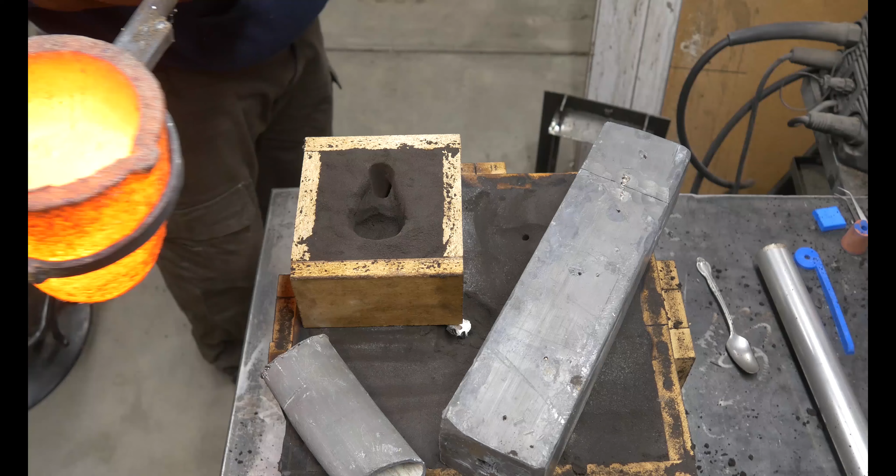If I ever thought there was a chance I would get a deal with Devil Forge where I could promote their furnaces, that is done with this video. Not a single chance. I give grief to those guys, call them the Lithuanians from Lithuania, but in fairness to them, it's easy to pick on the big guy. They own the market, no question about it, and they've done more probably to enable people to get into metal casting and foundry work than anybody else I can think of. So hats off to you guys for doing that, but I'm still going to pick on you because I'm the little guy.

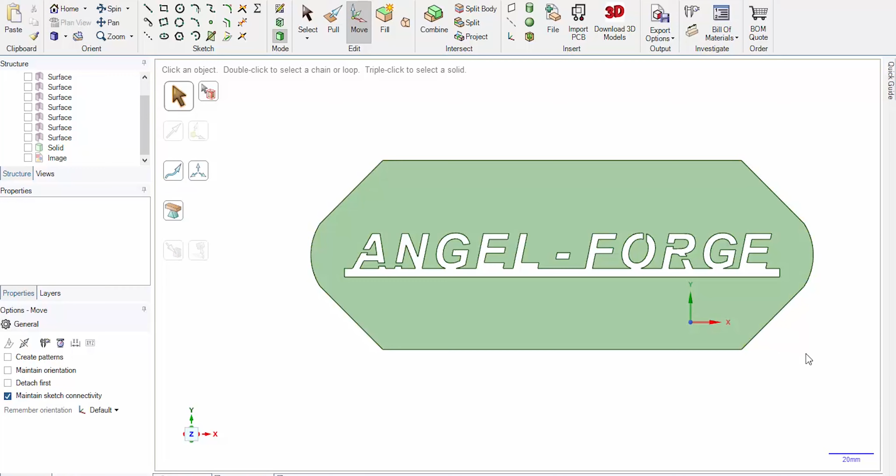First of all, this is why it prompted me to talk to Julian. But second of all, I actually do have 3D modeling skills, I'm not a complete loser. But that was the plaque I originally designed. It very much mimics the Devil Forge plaque.

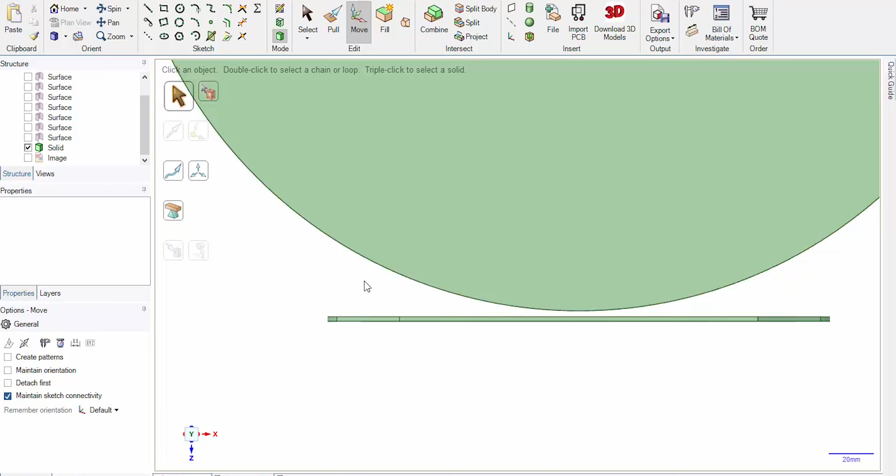Problem is it's flat, and if you put this furnace in there with it, you see there's a big gap here on the edges. And I don't think you can roll or curve aluminum. So I thought, well, maybe I'll just cast a curved one like this, and I modeled up a curved one.

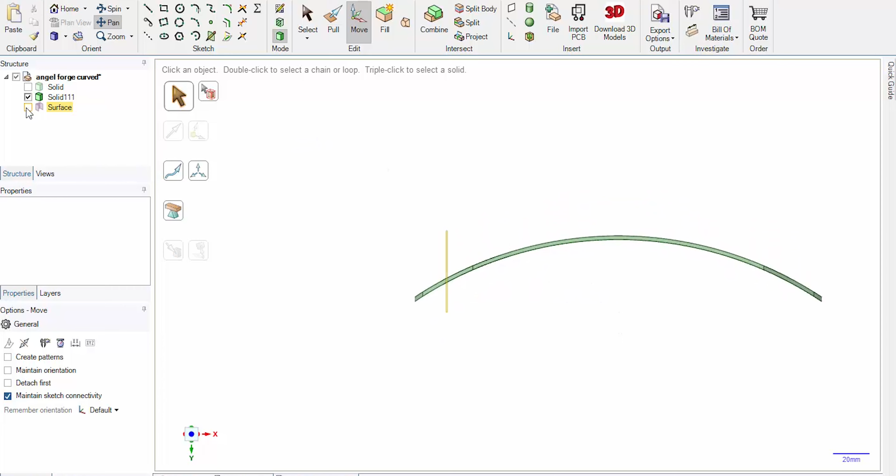Well, the problem comes in the drafting of the letters behind, and Julian kind of alluded to this as well. This is the direction this wants to move, right? It wants to move straight out of the sand if I were to cast it. And if I put a line in there that indicates that direction, and look inside the letters, you can see the problem right there. The letters would be straight up and down, so I'd still have to draft it even further, and every character is different. This would have been a really tough manual process to draft each one individually.

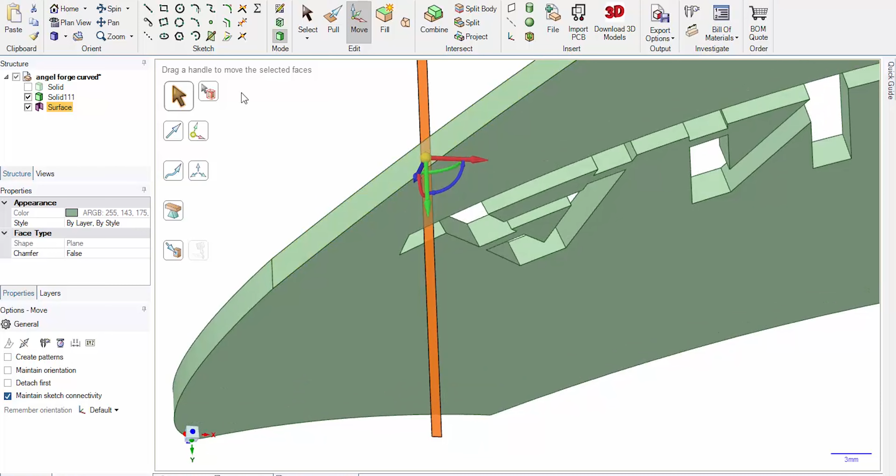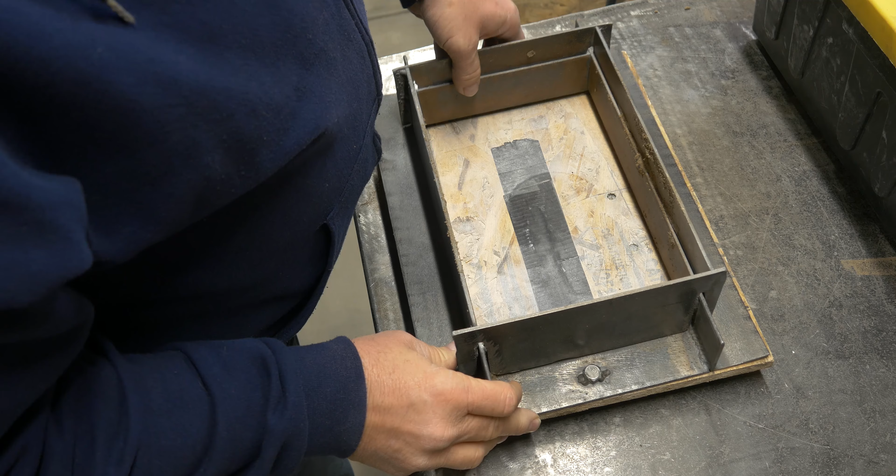So okay, let's go ahead and get into the actual casting. As I sit here doing this voiceover, I'm not exactly sure how I'm going to do this edit. I was thinking about showing everything, but maybe I'll just skip stuff you've seen a million times.

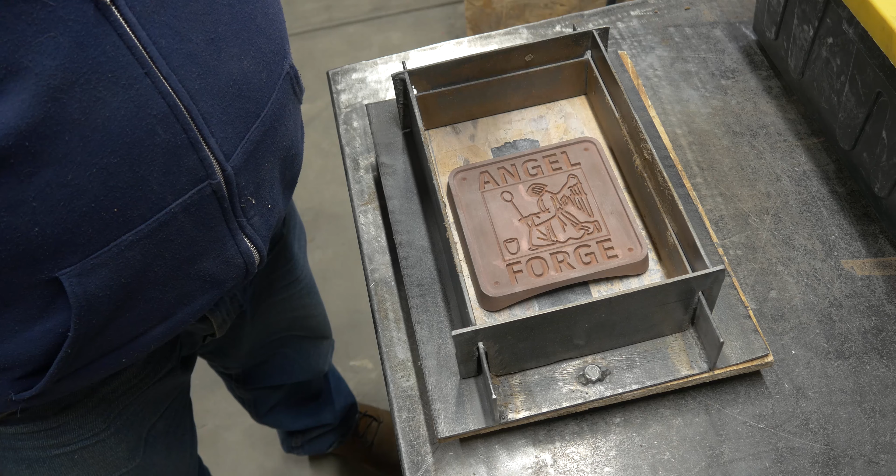Here's what's interesting about this pour: we're going to pour it face up in the cope. Normally people would pour this thing face down in the drag, it's probably the easiest way to ram it and probably the easiest way to pour it. But the nice thing about pouring face up in the cope is I don't have to worry about loose sand affecting the face of my image, which is kind of a nice deal. So we're just going to ram this thing up. This is actually in the cope right now.

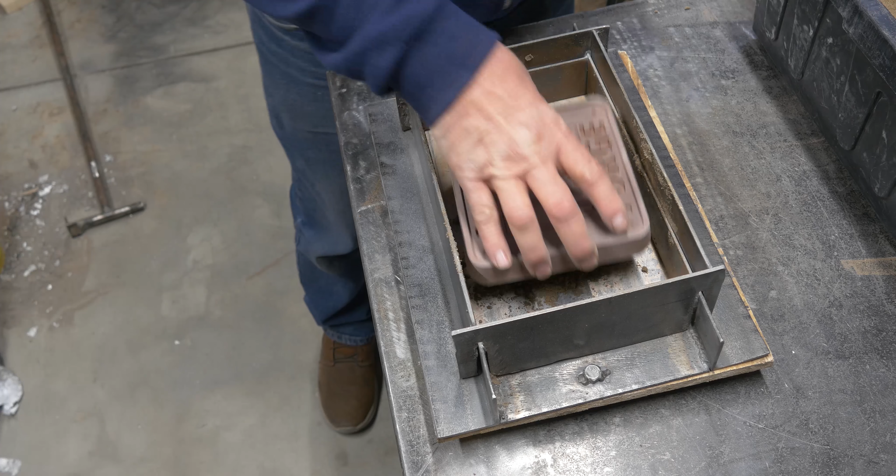I'm going to put some sand underneath the mold to support it because it flexes when I ram this thing up, and I wanted to try to keep it as flat as I can. I probably should have put some more sand underneath there because it still flexed a little bit.

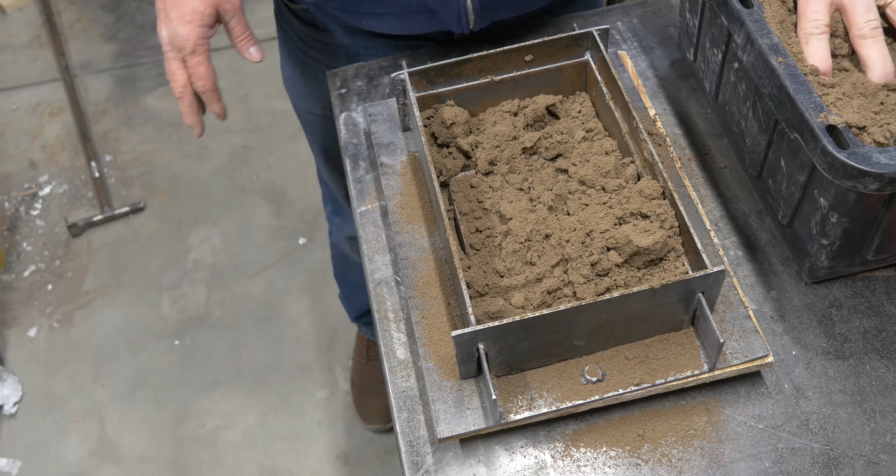We're ramming what's called a false cope. A false cope basically is we're going to ram this thing up, and we're just using it to get the drag rammed up. We're going to tear this thing apart and re-ram it once I have the drag done.

All right, I've got my false cope rammed up now. Got the table all cleaned up so I can flip it over. And there's the support I had underneath the thing.

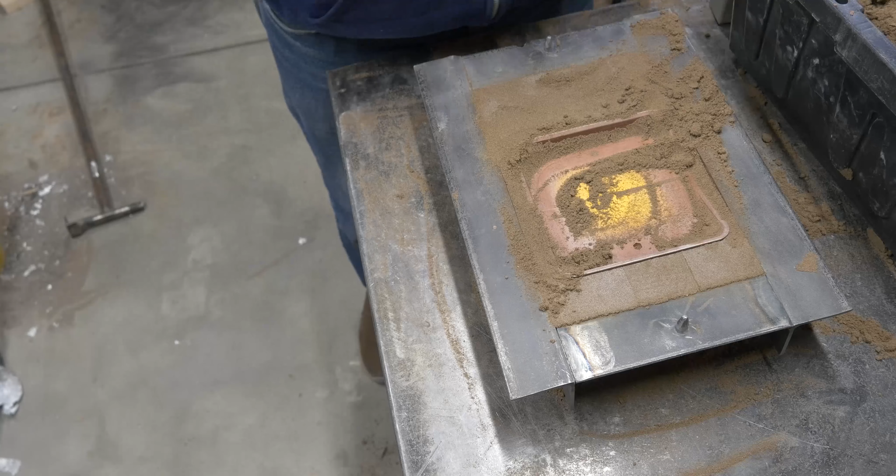Now comes the process of getting the mold ready for the drag. What we're going to end up doing here is a process called coping down. We're going to cut down to the cope line, the parting line. Maybe it's parting down, I don't know.

But basically what you see me doing with the spoon there is cutting an edge so that when I ram the drag, it will actually build in the support mechanism underneath that part of the pattern. This would have been really nice had I had a wider flask, a wider box to cast this in, because I've only got about half an inch, 12 millimeters or so of space here between the part and the box.

And it's really just not enough to get enough sand support in there. I wanted a nice diagonal line, I call it - I don't know what you call it. I wanted an angle so that I could get down to the part, and I'd also have a nice release mechanism for the drag when I ram it up here.

So I'm kind of cutting it down at an angle. I don't know if you can really tell that, but that's kind of what I'm doing there. And I'm pressing it down in there, trying to get it tight and hard. That was the other problem with having such a small space - it was hard to get it rammed in there and get a nice firm surface to ram against. And that's one of the things with these false copes: they need to be hard enough that they're not going to deform when you do the drag.

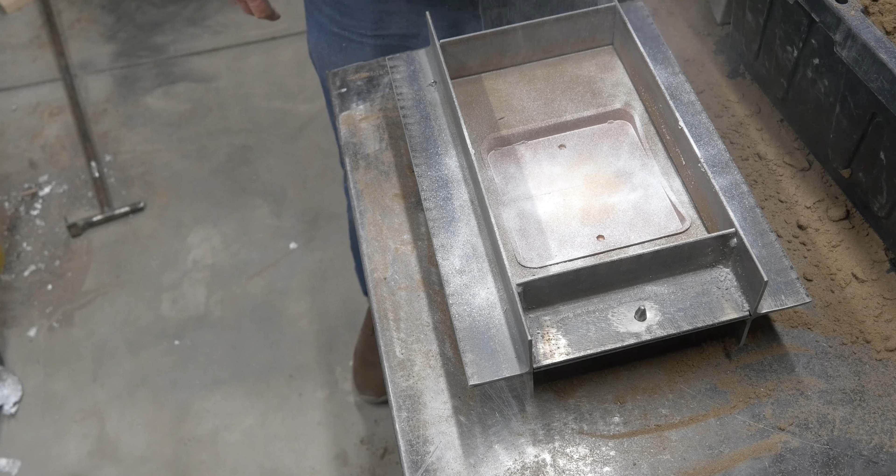Put a lot of parting compound in here because I want this thing to come out of the mold cleanly. And then go ahead and lay in our runner and spin trap as well. I want to try to position it in the right place for the gate that I'm going to put on there. You'll also see in the end, it didn't work out that way.

That's all right, it worked out. Everything worked out in the end. And we'll just riddle in some more sand and fill in the drag as if we were doing a normal pattern here.

Okay, we've got everything rammed up, cleaned up - not really cleaned up, but we're going to go ahead and pull this false cope off and ram it up. And you might be wondering, why in the world would you do a false cope? There's the support mechanism that's built - that's the big reason we do it. But why not just ram up everything and use it, right?

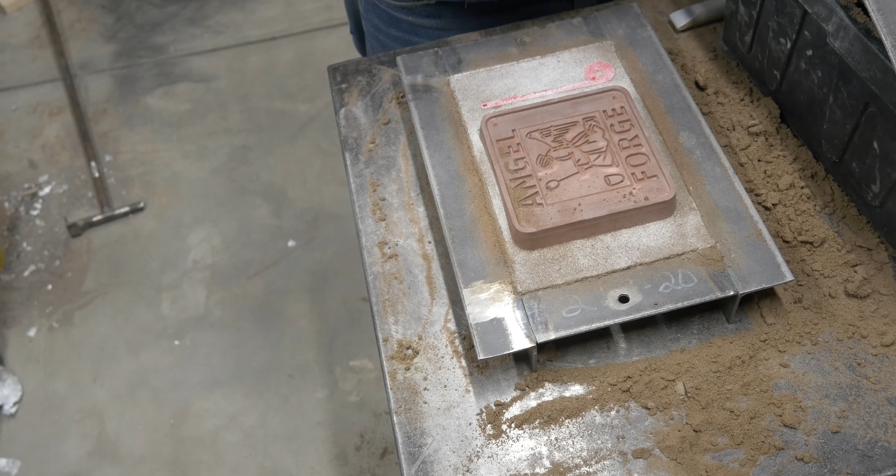Well, you'll see here in a second that the reason we don't do that is I don't have a sprue rammed in there yet. I don't have the vent in for my surge trap or spin trap. I don't have the extra upper half of the spin trap in. And that stuff would be really hard to do in a false cope because you've got it upside down and I've got things coming out of the top of the surface.

So it's a big reason why you don't do it. And it only takes actually a couple of minutes to do a false cope. When I looked at the video here, I'm at about 2.5 minutes to do the false cope.

And that was from start to finish. So it's really not that big a deal to go ahead and just ram one up and then tear it apart and do it again.

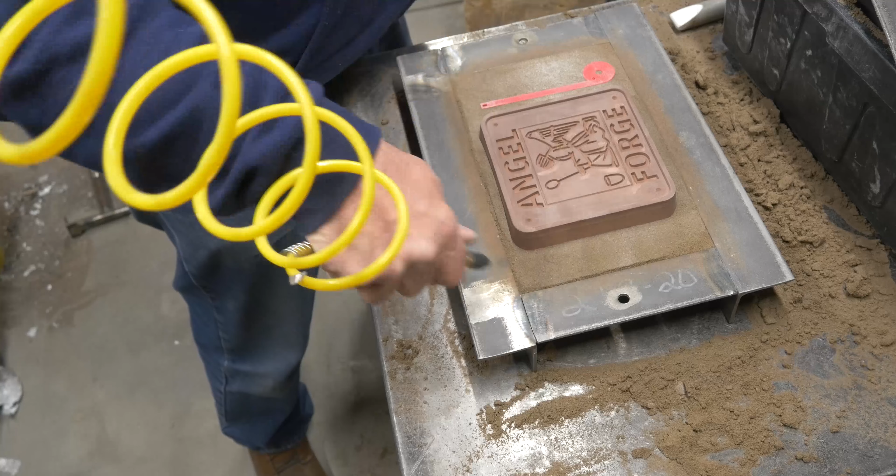Underneath this pattern now, of course, is a nice core that we've rammed up when we rammed up the drag. So now we're going to go ahead and put the cope back on the flask here, and we'll start ramming it up.

Here's my spin trap and a gate that's got to go in there, and lastly the sprue. There, to get it in there.

And a lot of parting compound. This part is hard to cast.

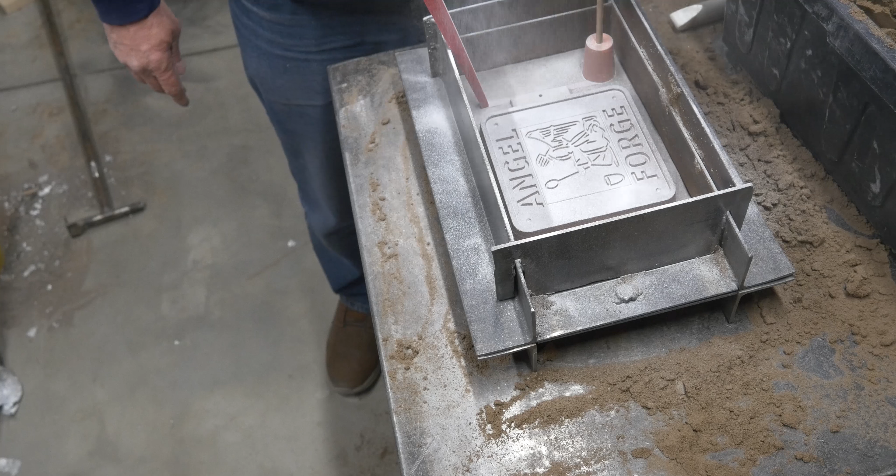When Julian made this thing - Julian, I love you, man - but those letters and all those lines were deep, and it was tough to get that stuff to release. I would have probably...

...made the pattern a little bit shallower, easier to release, but you know what, it turned out okay. You'll see in the end, it actually turned out quite well, but man, it was tough.

Normal stuff here, we're going to riddle sand in and cover everything up with a nice fine layer of sand. No big clumps to have to worry about breaking down while we're ramming.

Then we'll just go ahead and fill the rest of the mold, just like you would normally do.

I probably would have been smart here to press more sand down with my fingers around the edge of that pattern, because I have the same problem now. There's just not a lot of space there, and it's hard to get it to ram in tight because it's such a tight space.

With the box filled in, we can go ahead and start ramming it up. Like I said, I should have probably pressed a little bit tighter in this area that I'm in right now, but it turned out okay.

All right, we're all struck off here, and we're going to go ahead and cut the pouring basin in now.

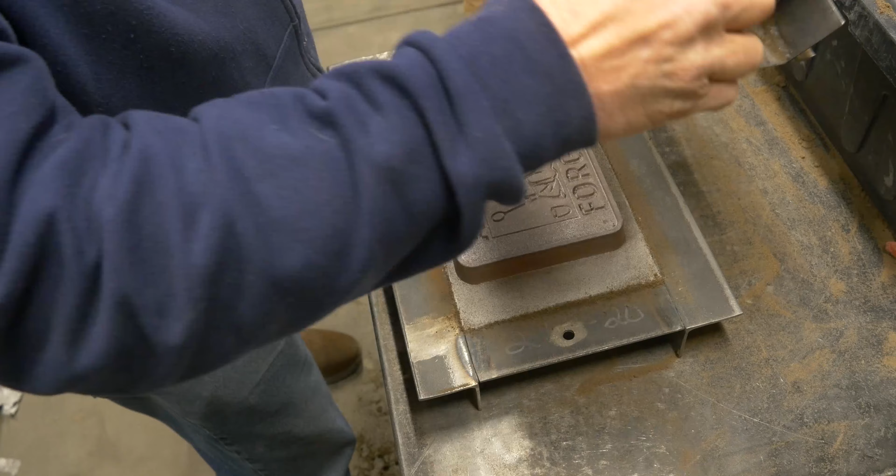All right, basin's all cut. Now let's go ahead and open this thing up and see - there's why I didn't need the pattern pulling holes, whatever.

The things that Julian put in the backside of this thing so I could pull the pattern out - it's stuck in the cope, which made it actually quite nice for getting it off the rest of the mold.

It released pretty clean. A couple of small little issues - some of the definition in the angel got lost, but for the most part, it came out pretty darn clean, so I'm happy with it.

You see me blowing the molds out. I use a lot of air, it's very low pressure. I don't want to tear up the mold, but I want to get rid of any loose sand that's in there.

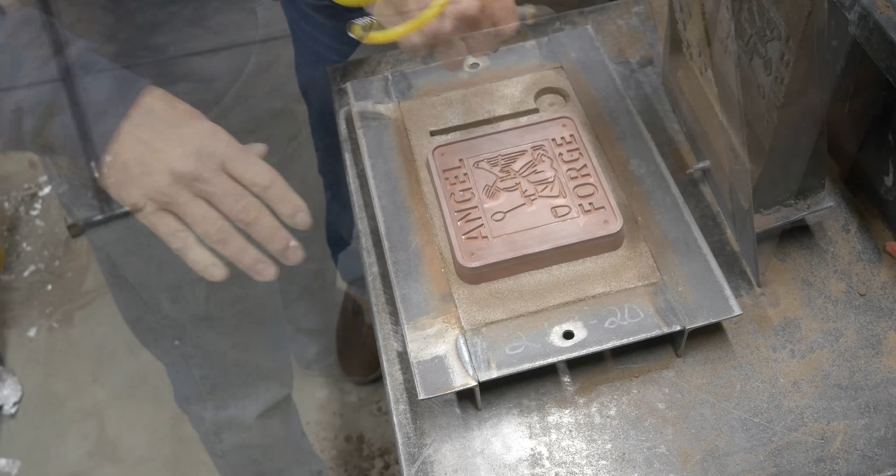All right, so the nice thing about what happened here is I can tap this guy to the side and loosen it up a little bit, and I don't have to worry about breaking any of that fine detail that was up on the face of this pattern.

That's always a concern for me when I go to tap things, and I'm going to just move it sideways and break it off. And it really was stuck down well here - I had to tap it a number of times to get it to loosen up.

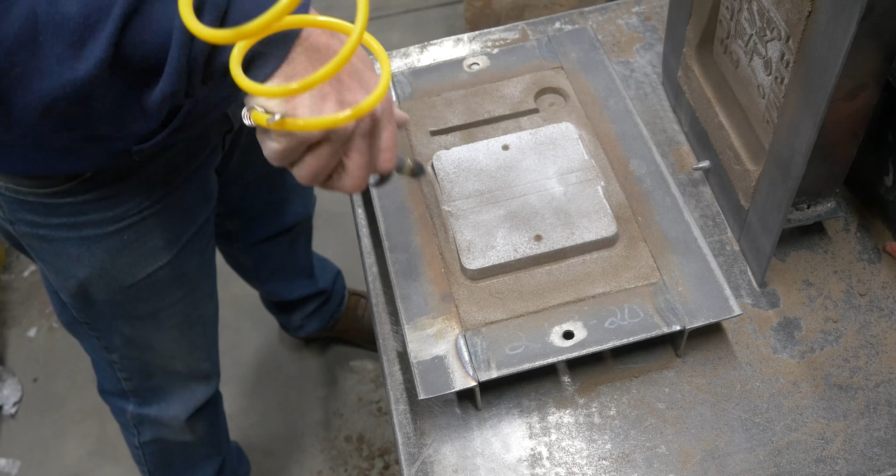There we go, you can see that core rammed up really well. We have the edges, the curved edges that are going to go against the curve of the furnace are there. Really nice core came out.

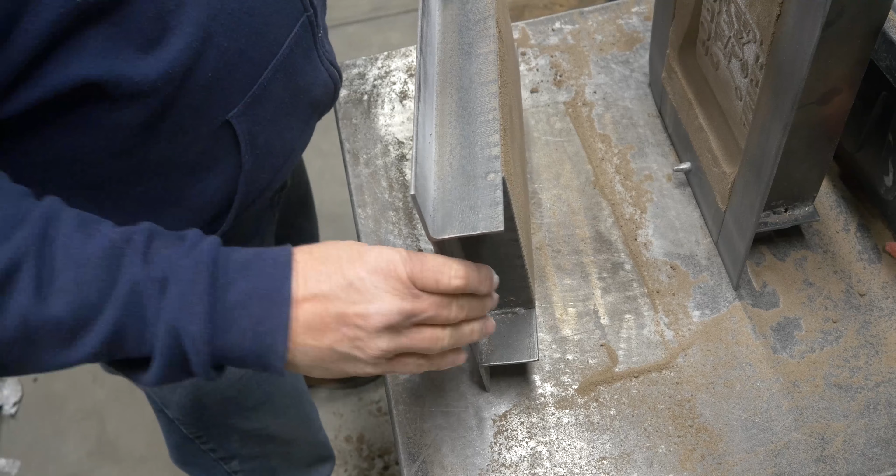Okay, we'll open it up again, blow it out one more time just to get rid of any loose sand that might have fallen when we shut the mold up the first time. And we should be ready to pour now.

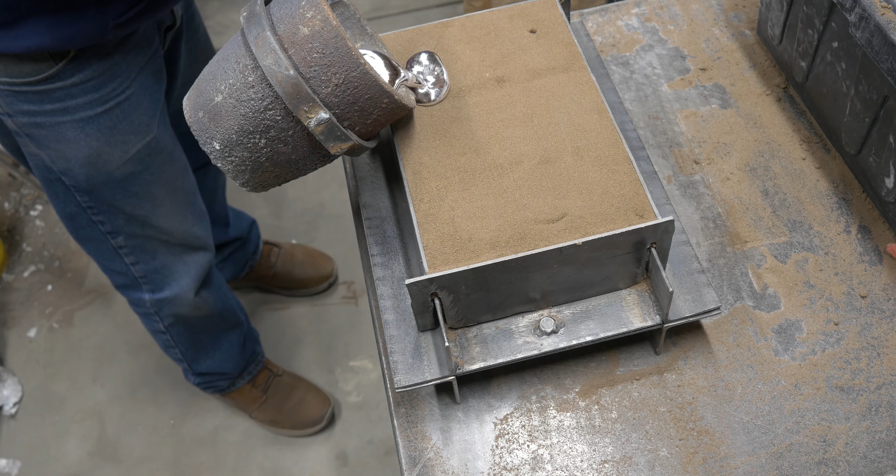Get the crucible down nice and close. Nice, easy, gentle pour into the basin. Keep that sprue full. And there we go, we're done.

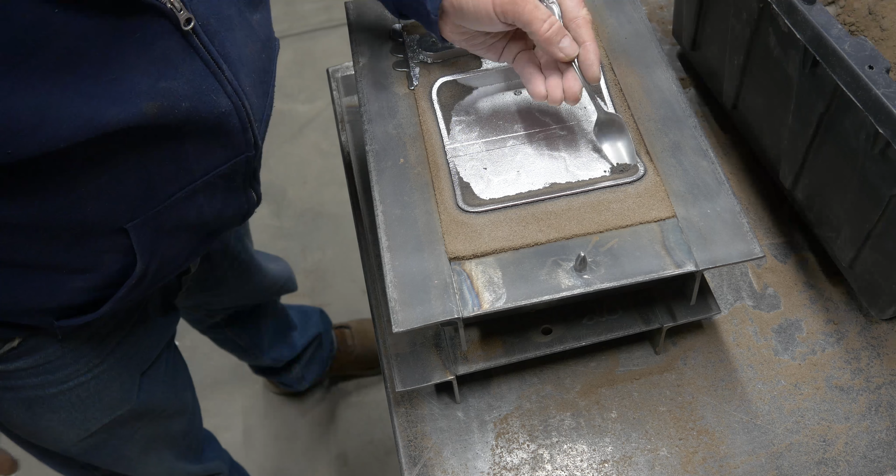Okay, it's been a couple minutes. Let's open it up and see what we got. Good sign, good sign, burnt sand everywhere. Whew, good, got a completely filled pattern, filled mold here. Just check the corners and make sure that it actually did fill okay in there. I think it did.

And I forgot to shoot it coming out of the sand, but you can still see sand stuck in it.

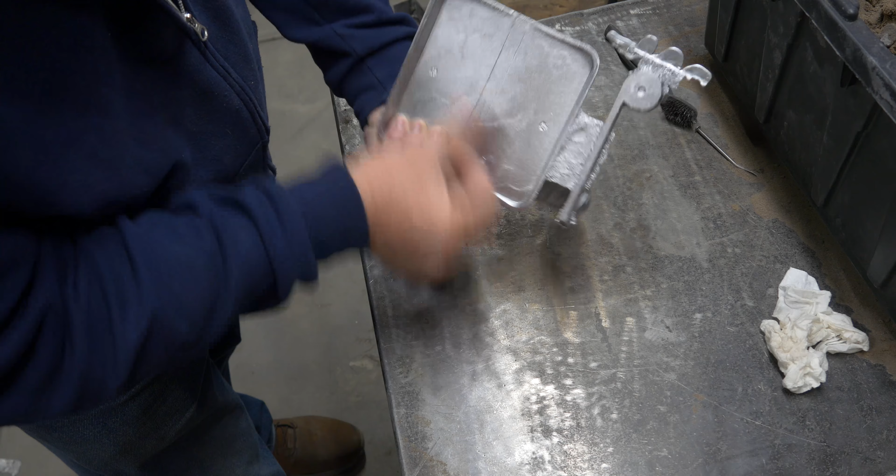And I've taken it in. I've actually washed it off with some water, got all the sand off of it and out of it. It looks pretty good, looks pretty clean. Surface is pretty nice. Nice thing about pouring with the face up is I don't have any holes in the top. You can see where my gate was a little short there.

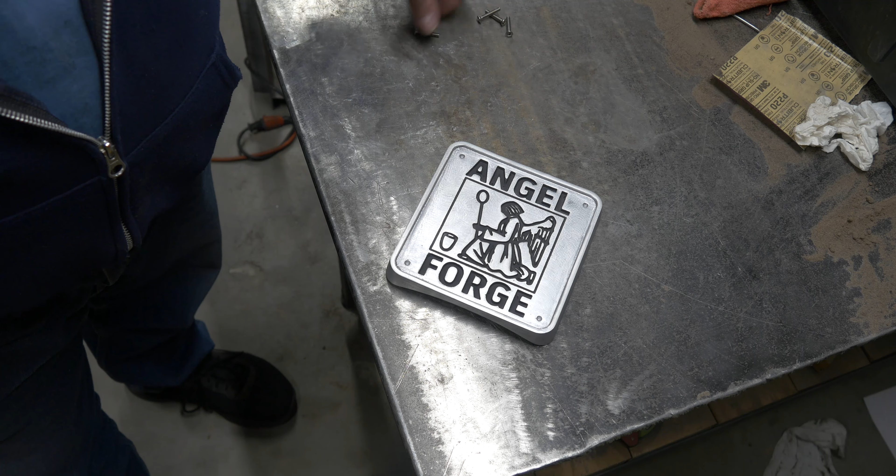And here it is, I sanded it smooth. I used, I think, only 400 grit sandpaper. Got to drill out the holes that Julian put in there for me, the little indicators he put in.

And there they are, drilled out. But the screws still don't go through because that's only the tapping size. I need to use that as a guide on the furnace.

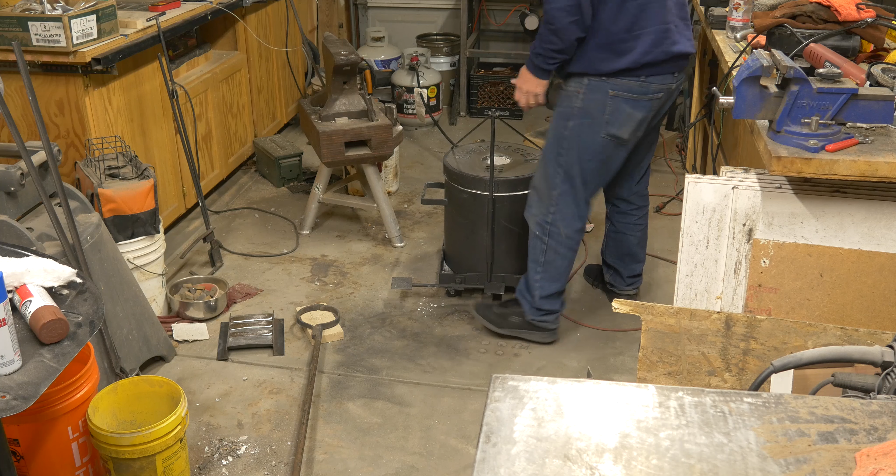But first I got to get the furnace over to the table. So take the lid off of it, take the burner out, and then stand there and think about how heavy this thing is.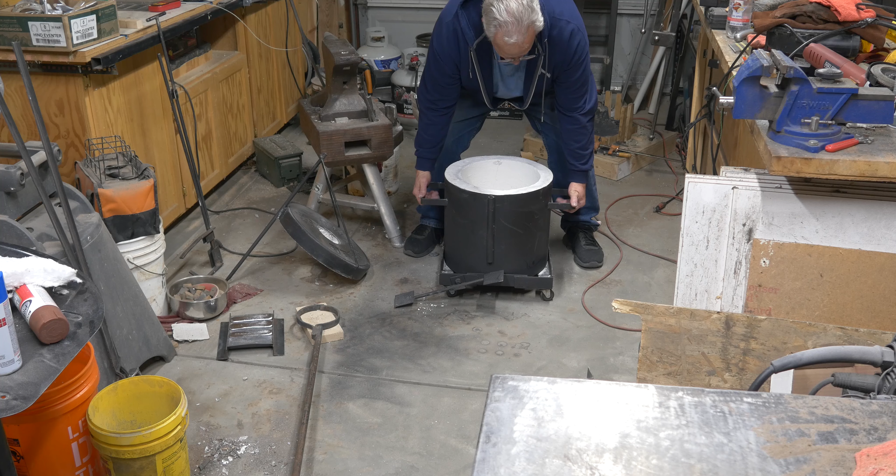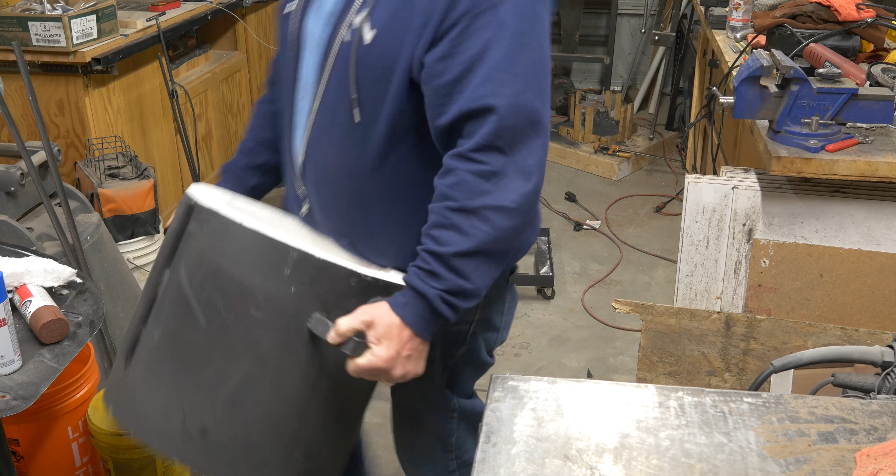And try to break my neck. Oh. Ugh! Get it up there. Oh, got it up there. Man, that thing is heavy.

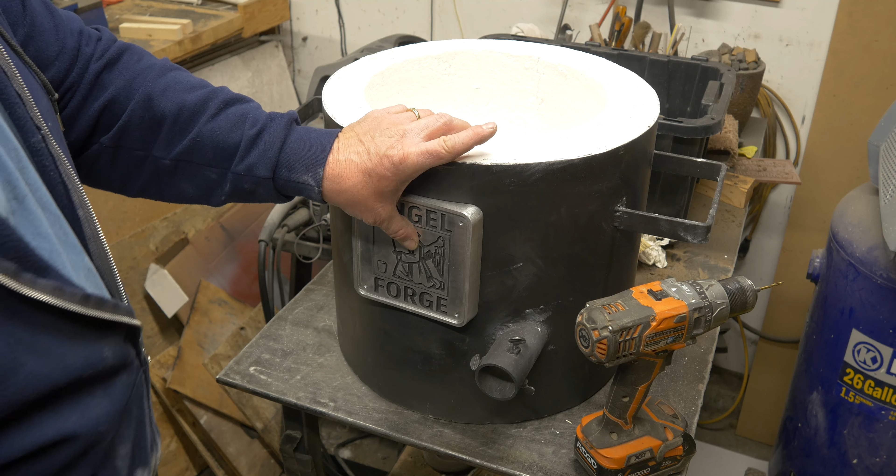Okay, so I just got tap size holes drilled in the plaque. So I'm going to just put it on there, mark it with a drill bit, and then we will punch it and I'll drill it in for tap size. I'm only going to do one hole at first just to get the thing to stay on there so I can do the other holes later.

Trying to drill in at the same angle that the screw is really going to go through, not perpendicular to the face, but sort of at an angle, because that's where the screw is going to go.

I'm going to hand tap these because I am too big a chicken to put it in my drill and just drive it in. Nothing worse than having a broken off tap in a hole. Don't want that.

We'll get that one screw in. This camera had trouble focusing for some reason all of a sudden, I'm not sure what was up. I'll go ahead and tighten it down, and then we can mark another screw hole with it tightened down.

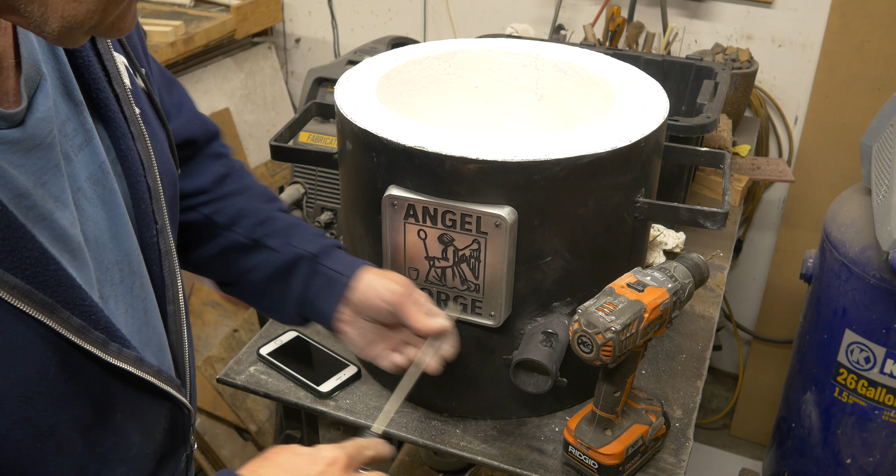The nice thing about the shape is it actually goes on there square. And here we go, we got it on, all the screws are in. And I tell you what, I think it looks awesome.

All right, so there you go. There is no endorsement deal in my future. I can feel it.

That's all right, I have a really cool looking badge on my furnace that I absolutely love. Julian, bud, thank you very much. I love it. If you guys haven't been over to Julian's channel yet, it's Julian HG, go check his stuff out. Insanely talented guy, fun to watch, just a good all-around good guy. He was a blessing to me in this whole thing. Believe me, I could not have done this without him.